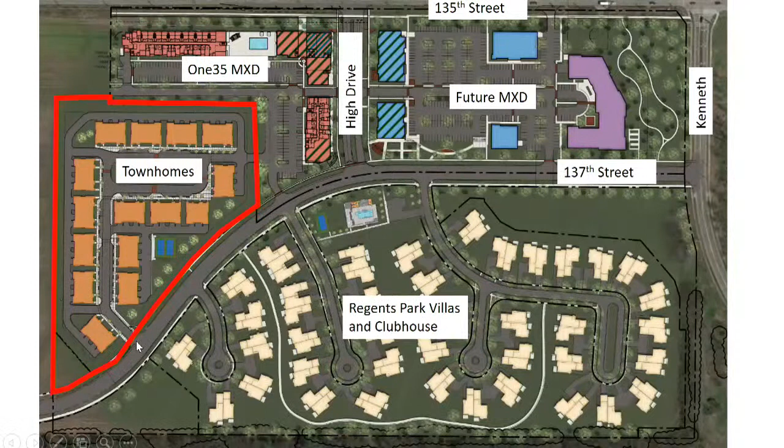So just to orient everyone to the site, since it's been a little while since 2020 when we first got this approved - the 135 development borders our site, which is highlighted in red here on the west. 135 borders us on the north and east sides, 137th Street to our south, and the villas and recently approved clubhouse to the south, currently under construction. As Catherine mentioned, our primary entry to the site is off 137th, and our secondary entrance will be off 137th here through 135.

I'll just highlight some items of the site plan. The townhomes are a 2-3 split design, so the front is 2 stories as it fronts the main entry drive along the park and main entry. We utilize the grading to slope down to the back with the garages on the rear side of the development, so they're rear entry garages. Each unit has 2 spaces in those garages, plus additional parallel parking out front for convenience of residents or visitors.

One of the things really exciting about this project, which I've been looking forward to for quite some time, is the enhanced resident balconies and pedestrian streetscape. You have this private loop drive, a very nice internal park, and along the parallel stalls a sidewalk with alternating planter beds, plus raised front porches in front of each unit. If you're having your morning coffee, or my wife and I like our afternoon wine in front of the house, and see our neighbors walking around - I think it really lends to creating a nice, elegant pedestrian experience in this development.

Amenity-wise, we have pickleball on the south side, nestled in on the back of some of those buildings. On the bottom right is a quick close-up rendering of that streetscape, showing how the parallel parking interacts with planter beds, sidewalk, pedestrian scale light poles, and steps up to that public-private balcony.

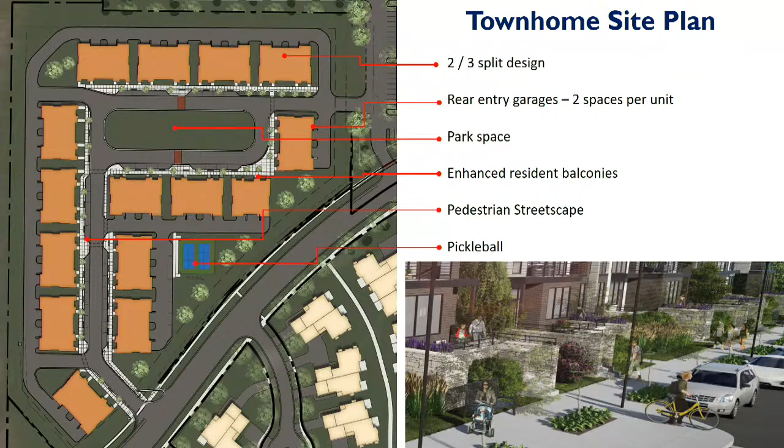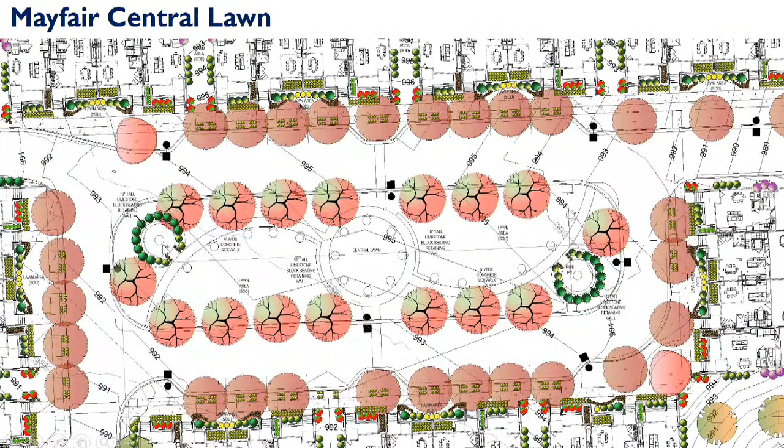Also featured is the Mayfair Central Lawn, or park, within this development - a really nice feature for all these residents. I'll also say these are ownership units, not intended to be for rent, so those residents will have access to the park. There's a central lawn area, limestone seating benches along this curved area, two semi-private areas with fire pits, and lit bollards as well.

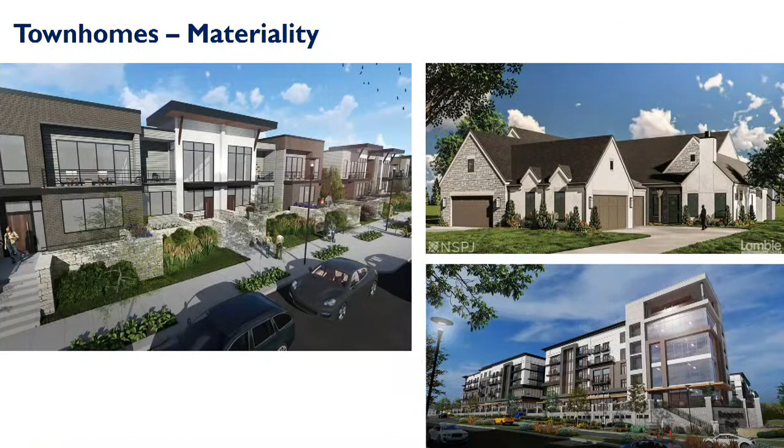To get to the overall design, again trying to create a cohesive development - we're on the north side of 137th, next to the 135 development pictured bottom right, with the villas pictured top right. We're pulling a lot of the materials, colors, and forms from these buildings, including flat roof designs to mimic the 135 development we're next to. This rendering also shows some of those balconies and front porches.

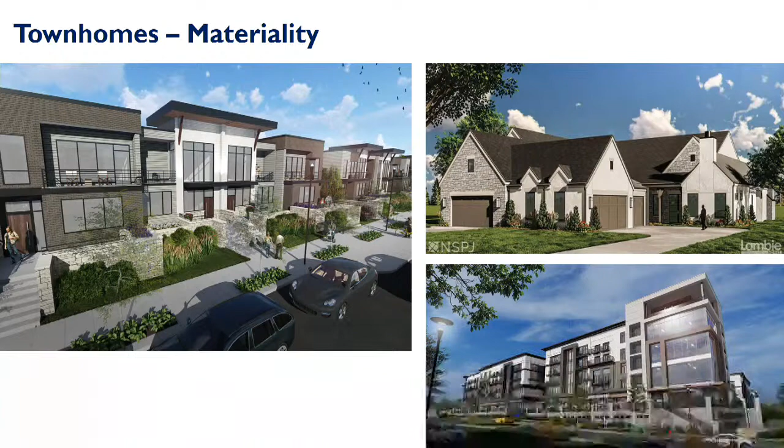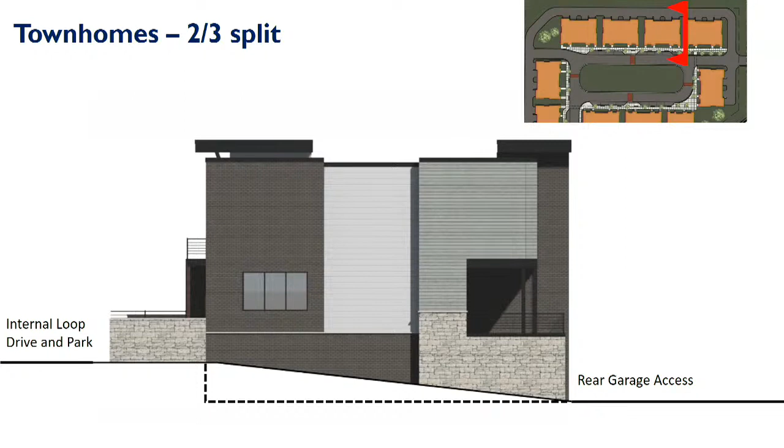I want to touch on stipulations. As Catherine mentioned, we worked with staff and worked through all of these. I won't go through the proposed language as we're good with everything presented in the staff memo in terms of all the language here, but just to clarify exactly what we are intending.

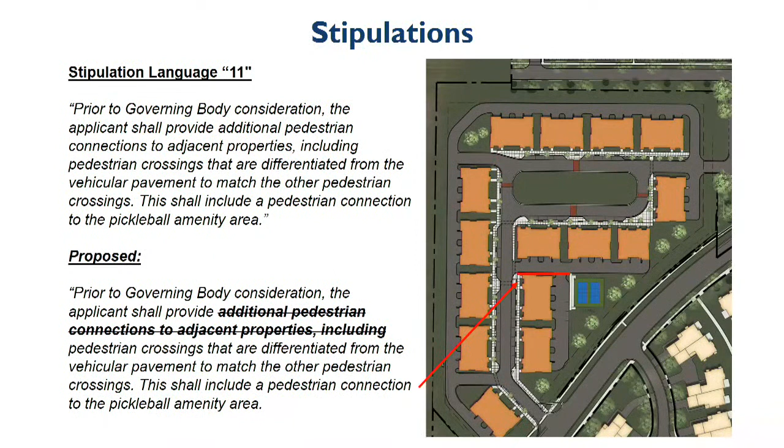This red line right here is that additional sidewalk that we are intending to add for connection to the pickleball courts. I think this little sidewalk piece right here, Commissioner Elkins, might have been what you were referring to in the parking lot. We'll remove that so we're not encouraging people to walk into that private street.

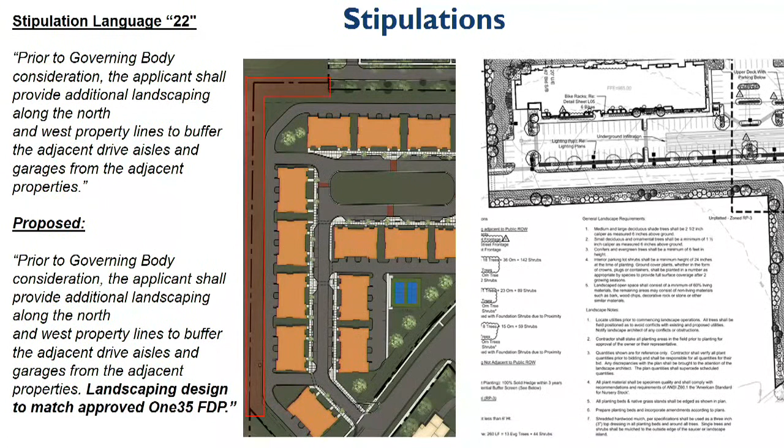In regards to landscaping, this area in red here, on the western boundary and the little bit of piece on the north here, that's where we will be adding landscaping to match what was approved on 135. Just for reference, I did a quick snippet of the landscaping plan that was approved at 135, so you can see that mixture of shrubs, understory plantings, and a few trees.

One stipulation I did want to discuss that was not talked about was stipulation 16, which asked for all the downspouts to be enclosed. We would like to propose the removal of that stipulation, similar to how we also requested it on the clubhouse. It's not required in the RP3 zoning, and it's not done on the adjacent twin villas, and we have the same concern as on the other project, that it causes water intrusion and invites wood rot issues. So all the downspouts will be on either the rear corners or the sides where they will not be visible to public view.

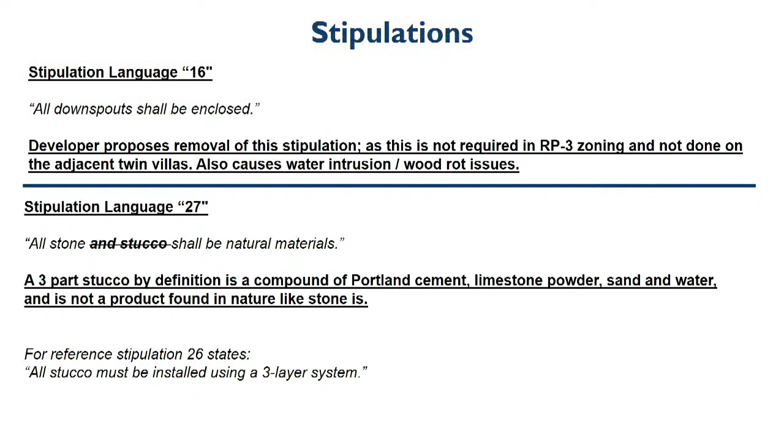With that, I'm open to any questions. Thank you, questions for the applicant?

Commissioner Block: How wide are the sidewalks in front of those? I believe they are 5 feet, and then they get wider as they're spaced with the planter bed, so 5 foot minimum, and they widen out as needed. Okay, and then I guess how wide is that alley?

I guess the feet won't really matter to me. My only reference is Meadowbrook and the homes there. I don't know if you're familiar with where those homes are, or which side that is on. I guess to the south side maybe, where there's a gate, and it's pretty tight. I've been back in those areas, and I wonder if a trash truck can navigate through there. So, yeah, the alleyways are, I believe, 22 feet wide. A standard internal roadway is 24, so they're only 2 feet more narrow than a standard road, almost a two-way street in width, just a little shorter. Okay, that's all I have.

Thank you, Commissioner Block. Commissioner Belzer: Can you tell me who your target occupant is for these homes?

Yeah, I think it's single family use. They are 3 bedrooms or 3-4 bedrooms. So it's going to be kind of those single family type occupants, and then if there are any retirees that might need the extra bedrooms for offices, but obviously open market too.

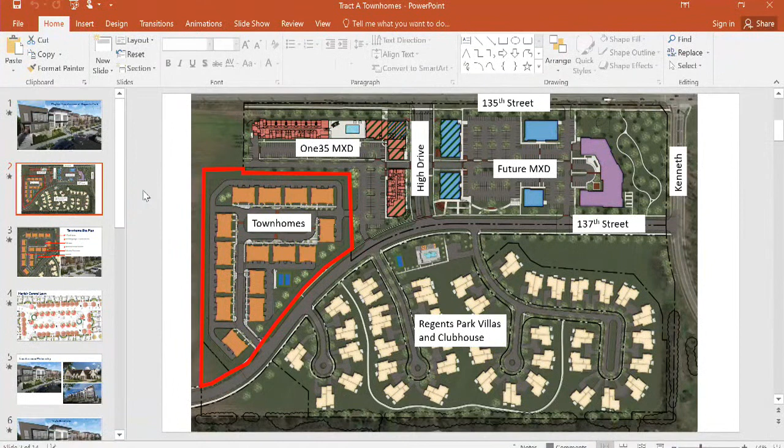If you don't mind, I know it's a little out of order. I think the easiest way that we would like to handle it is to just keep stipulation 11 as written. I was just looking through the grading plan real quick to make sure I understand where we could probably get sidewalks easiest. Let me get to an enlarged plan real quick.

Two options that I see, I think, to your point: bringing a little leg off here and heading to the north to connect is an option, straight up. Another route would maybe be to keep this piece here and come back down to the south within our own property and connect to 137th on the east side. That's a little bit easier from a grading perspective.

So we're open to look at either of those, and we can keep stipulation 11 as written if you guys prefer. I think we're best served to leave the actual design to you guys, but I think you hear at least what three of us are thinking in terms of the importance of not changing stipulation number 11.

And again, the other thing - I know we've already approved 135, and I don't know where they exactly stood in their parking, but I'll tell you how I'd design it: create some sort of walkway that goes right through the middle of that parking lot. You're going to lose a couple of parking spaces each row, so maybe 6 or 8 spaces, and that may create a compliance problem. I understand that, but what we're trying to accomplish is a long-term plan to improve the walkability of our developments in Leawood. The commission may see it differently, but I would encourage us not to change stipulation number 11.

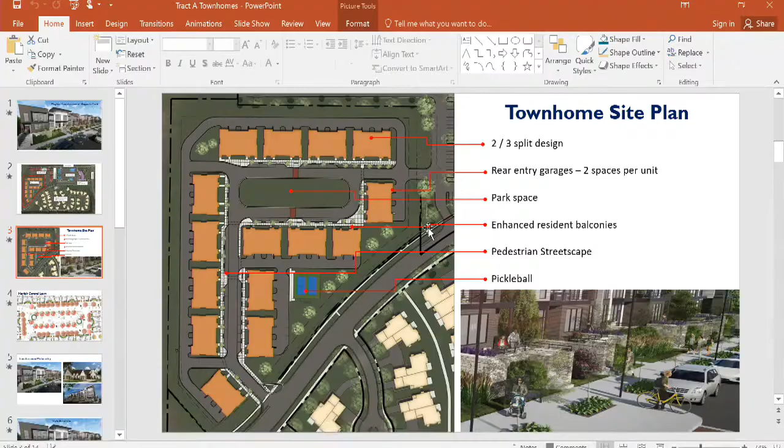Yeah, I would say with regard to this development - and maybe the applicant can speak more to this - flat roofs are much easier as far as internalizing the downspouts than pitched roofs. The pitched roofs, from what I understand, have to go through to the gutter and then another piece that wraps around and internalizes in, and that's really where a lot of that problem comes from. In addition, it's right on the edge where there's more tendency to freeze. I've heard some developers indicate that on a flat roof they can push the downspout inward, so it's surrounded and not so close to the surface of the building, so it stays warmer and eliminates that freezing potential.

Okay. Other comments or discussion? Commissioner Coleman.

Thank you, Mr. Chairman. Just two points. I agree with the other commissioners on connecting to the other developments - I'd put both in, a north access and south. Otherwise people are going to create their own, like Commissioner Belzer said - people who want to go north will walk over the grass to get there anyway. So I would encourage the developer to put both the north and south connectors.

I just want to make one comment on the ownership. We've seen a lot of apartments coming up on 135th Street, and we've talked about affordable housing. I know affordable housing in Leawood is a whole different subject because of the price point, but I'm very pleased that we're putting some kind of owner-occupied development on 135th Street as opposed to more apartments.